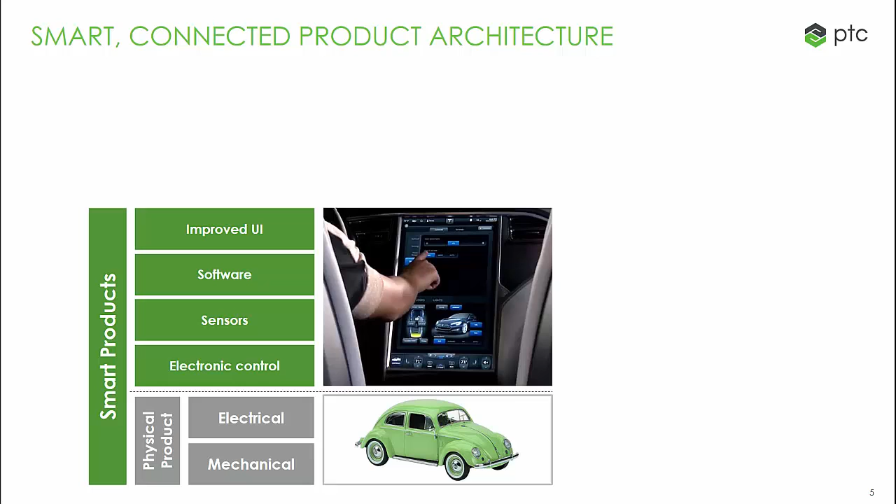So let's start by taking a look at general systems engineering challenges. We're all seeing a broad impact of physical and digital convergence - smarter products, connected products, even smart cities, smart farms, and smart manufacturing. One example is the automotive industry, where cars used to be purely electrical and mechanical, and then were extended with software, new user interfaces, sensors, electronic controls, becoming smart products. And now the connectivity of those smart cars means they can communicate not only with GPS and control centers, but also with each other for autonomy.

This is really an evolution into products being part of a larger system, and this means that we need multidisciplinary product development to cover all those different domains.

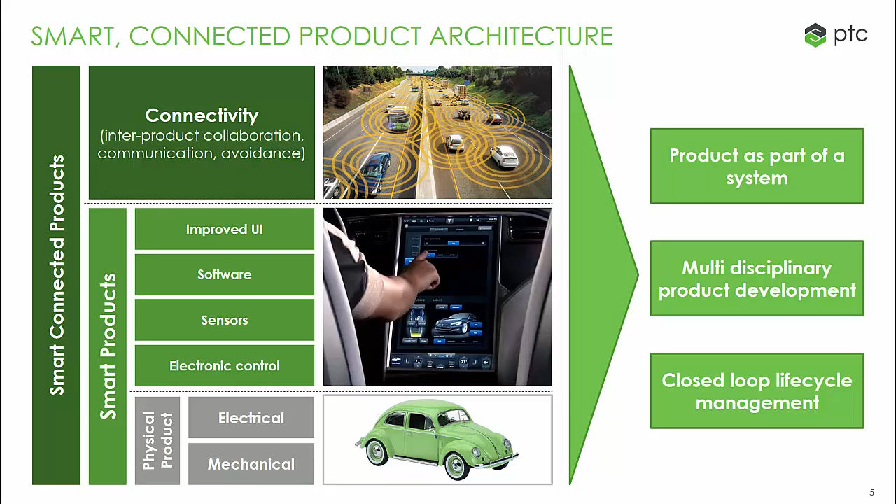So let's take a deeper look at some of the challenges of systems engineering for smart connected products and systems. Firstly, we're seeing a significant growth in the complexity and functionality of the systems and their software. In fact, a much larger share of the product cost is now software. We're also seeing systems being built of subsystems, so in a modular way, plugging subsystems together to build larger systems, either provided by one organization, by partners, or even by disconnected organizations. Certification and regulation are also becoming more important, particularly in industries such as aerospace, automotive, rail, energy, etc.

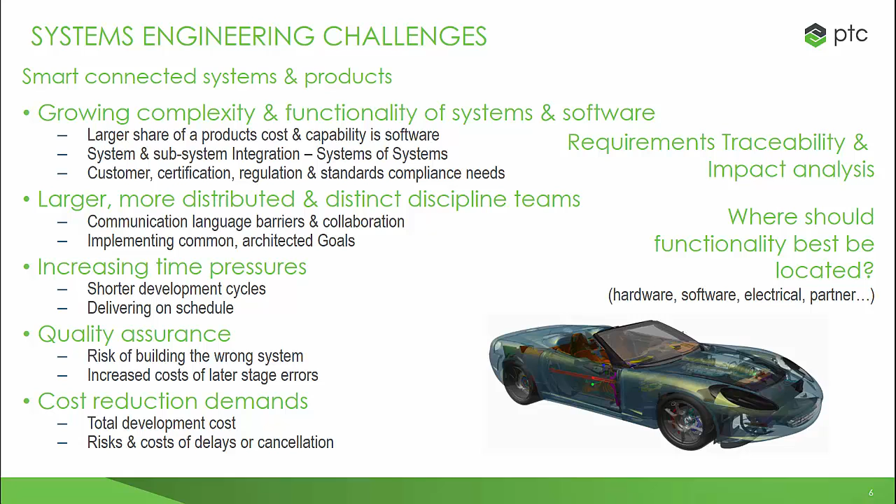The second main thing that we're seeing is larger and more distributed multidisciplined teams with barriers to communication and collaboration. So they need a common place to work together and share their goals and get stakeholder buy-in. As well as those focused systems engineering challenges, we're always seeing the same challenges of delivery on time, to quality, and reducing cost. Particularly with systems engineering, we need to see, in most cases, requirements traceability and impact analysis, so that we can make decisions about where functionality should be best located.

Then in systems engineering specifically, we're seeing some new trends. We're seeing more rapidly changing requirements and shorter iterations of delivery. We're seeing models as the core of communication between all stakeholders, incremental functional analysis, executable requirements with SysML architecture to enable parallel teams to work on separate subsystems, and also the need for asset-based modular design of subsystems and their interfaces and system variability.

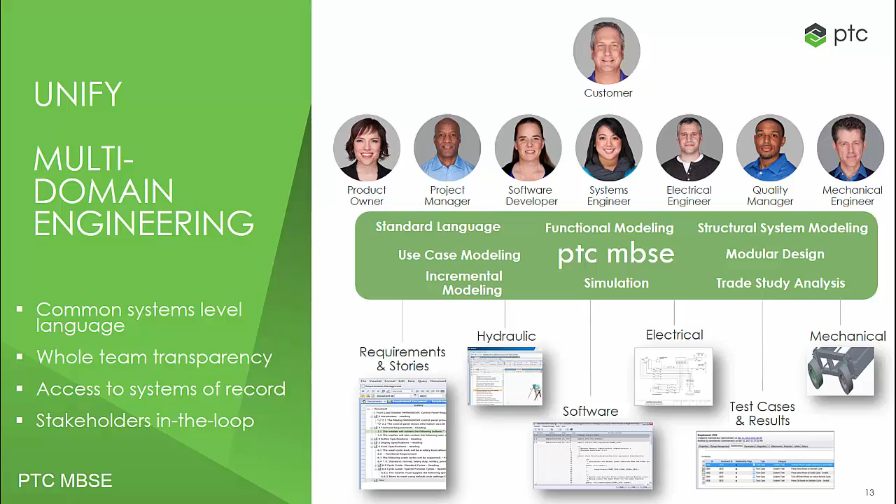We achieve this by using a live underlying database in Integrity Modeler, the modeling tool. Multiple users can share the same databases and the same information on all of their models. So let's take a look at an example model.

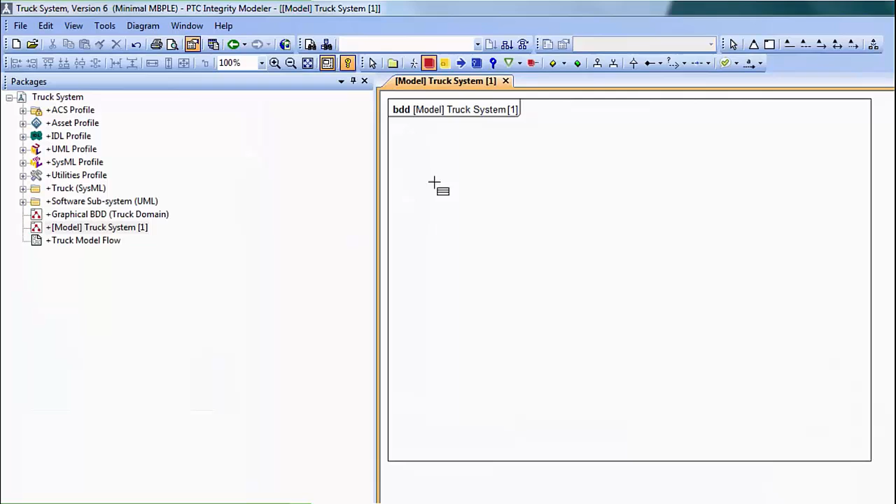In the model, we have both diagrams and data that's used on those diagrams. And the data is stored in a dictionary and can be used on more than one diagram. So diagrams are just views of the underlying data. They're not pictures like PowerPoint or Visio. This is a real model with views onto the underlying database.

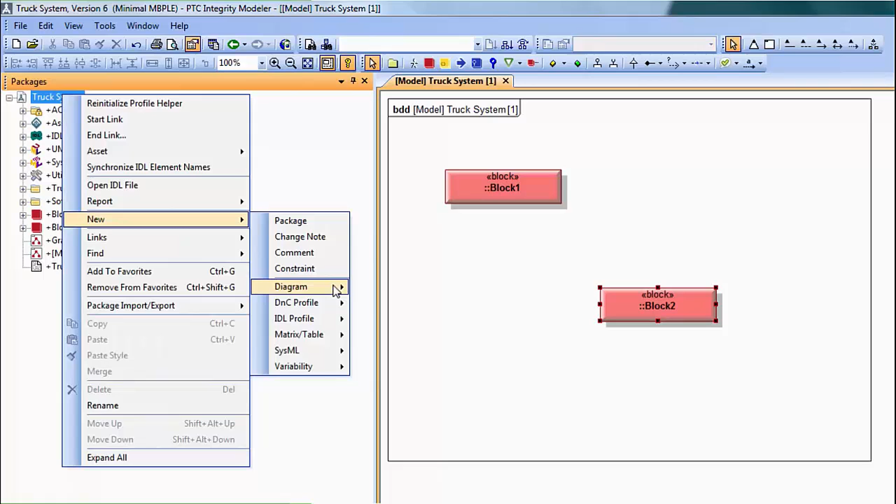So here I've created a diagram with two simple blocks on it and named them block 1 and block 2. I can create another diagram, so here's diagram 2, and use those same model items on this new diagram. I can put them in different places, link them in different ways, and create a view for a different audience.

If I make changes, so if I rename one of these items, let's change the name of this item, you'll see that it changes both in the database, in the dictionary, so here we have the new name item, and if we go back to the first diagram we can see that the name's changed there. So we have consistency throughout the whole model, no matter how many users are updating it at the same time.

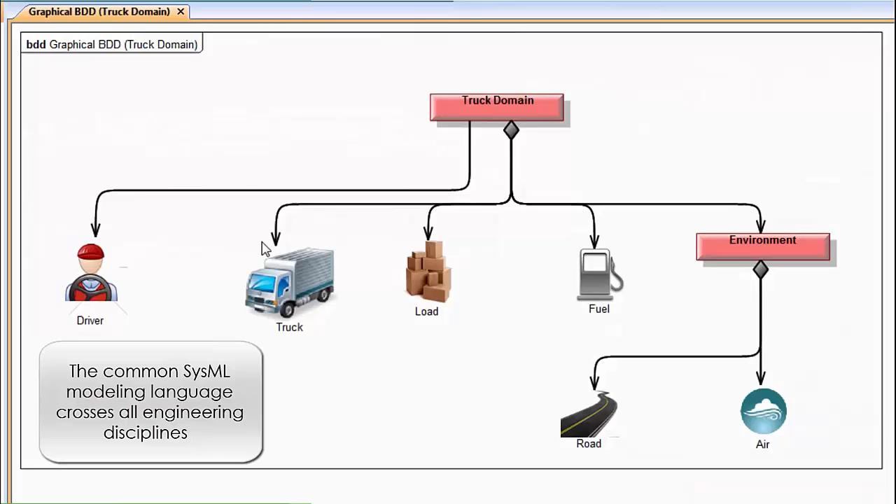We can also model our use cases, our functions, our structure with our blocks, and then link and trace between them. And the model has all of those links and traces built in for all of the traceability and impact analysis you need to ensure you build the right system and build the system right.

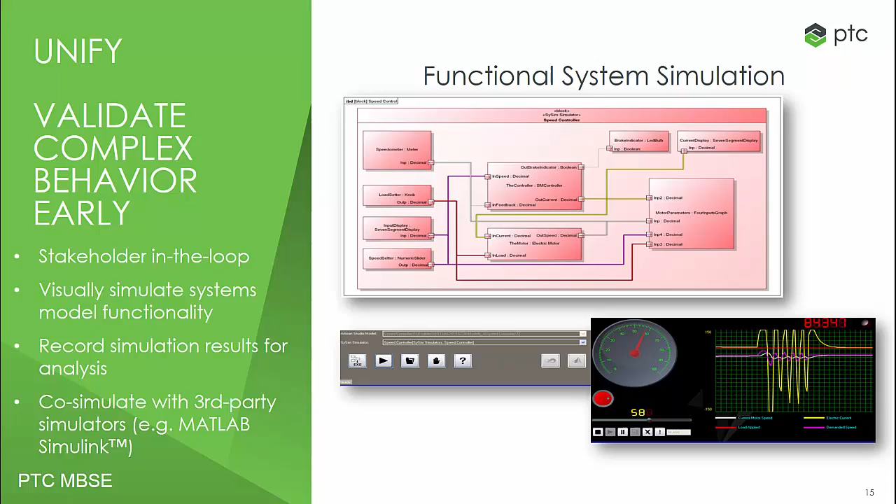Once we have that model, we can then look at it and simulate it, run trade study analysis to ensure we have the right functional design, to ensure we have stakeholder buy-in, and we can record the results and keep those as records, and we can also simulate with third-party tools such as MATLAB Simulink. So let's take a look at functional simulation with Integrity Modeler.

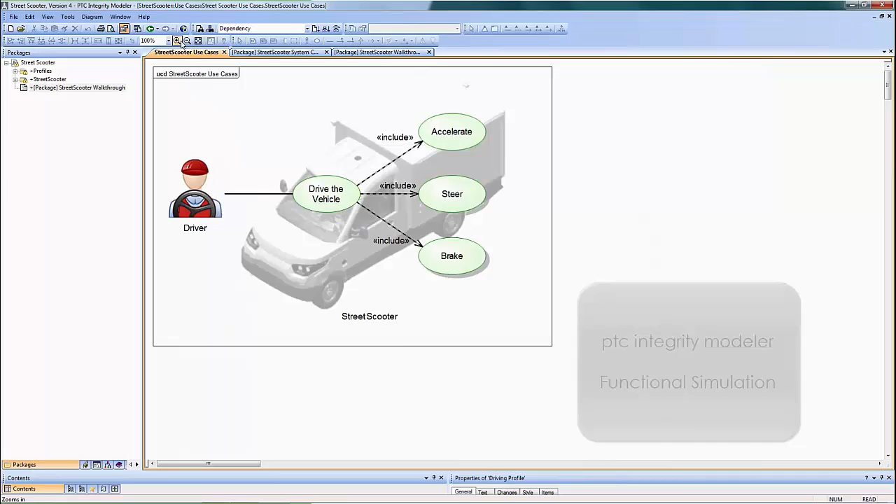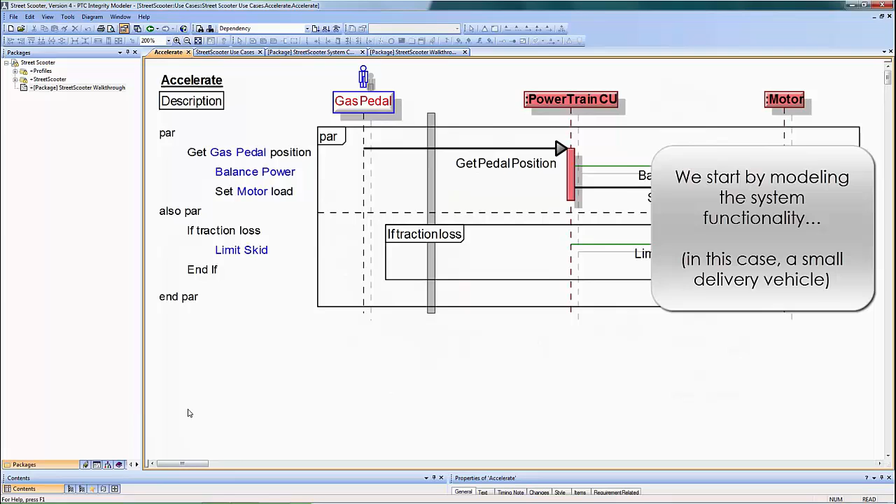So here's our basic underlying model. This is a truck called a StreetScooter that we want to simulate driving around streets to see how its electric power system functions. It has a detailed design of the structure, the functions and the requirements, and how all the parts fit together to quite a detailed level of design.

We can also model the simulation, and this is a co-simulation of parts talking to each other, and this is then used by Integrity Modeler's SySim to simulate the functional design.

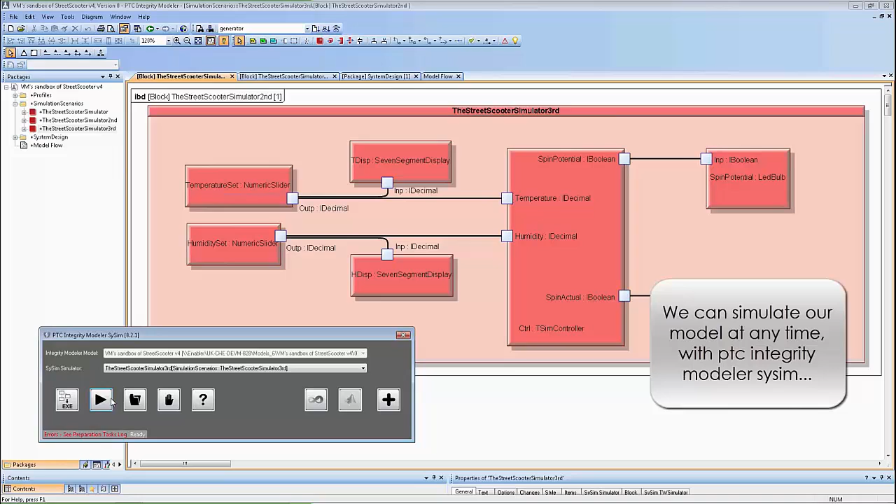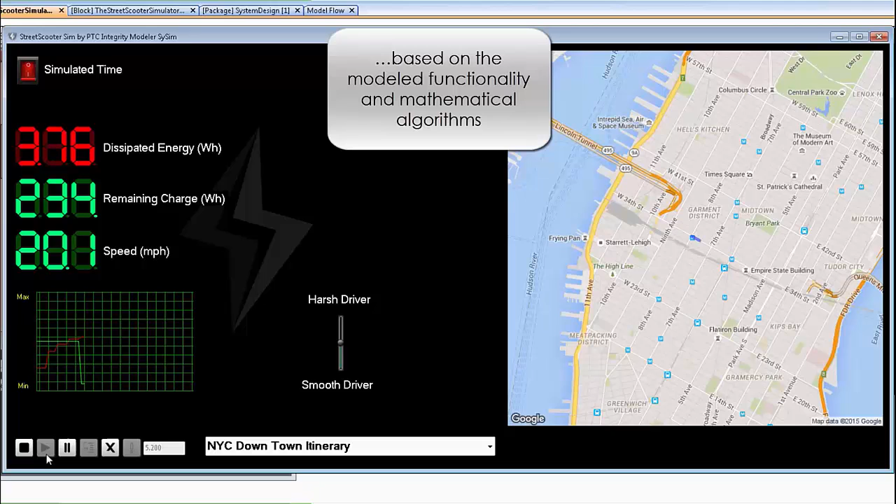So let's run up SySim, and here we have a mock-up interface showing the dissipated energy, remaining energy and speed of our truck. And when we run the simulation, it uses the algorithms inside the model to work out how much power is used as we accelerate, slow down, turn around the curves and speed up again.

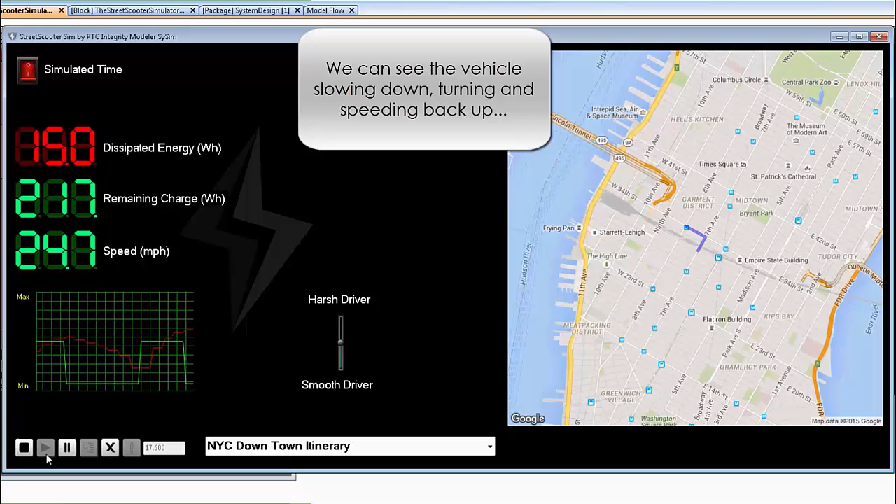We can see the energy dissipating from the battery, and in the graph at the bottom we can see acceleration and deceleration and that power use. So we can use this with the stakeholder, with other engineers to review the functional areas of our design to check that we have our design right.

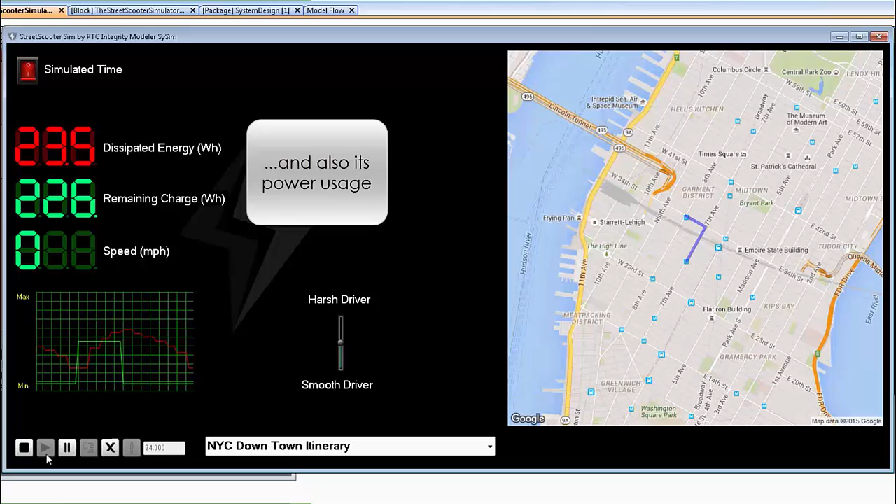If we find problems here, they're much cheaper to fix than later, even when we've started to build prototypes or physical systems.

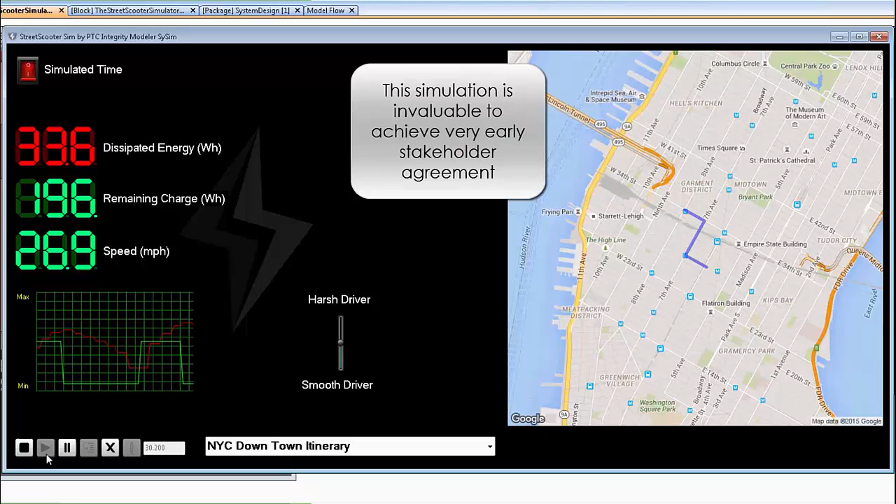As well as simulation and that modeling for communication, we also need to make sure we safeguard our design and that we're implementing in a traceable way. We need to do that by designing in quality rather than testing it in after we've finished.

So as well as making sure that people apply the modeling language standard in a compliant way and correctly, we also need to provide traceability and automated tools for early problem identification. So let's take a look at traceability first.

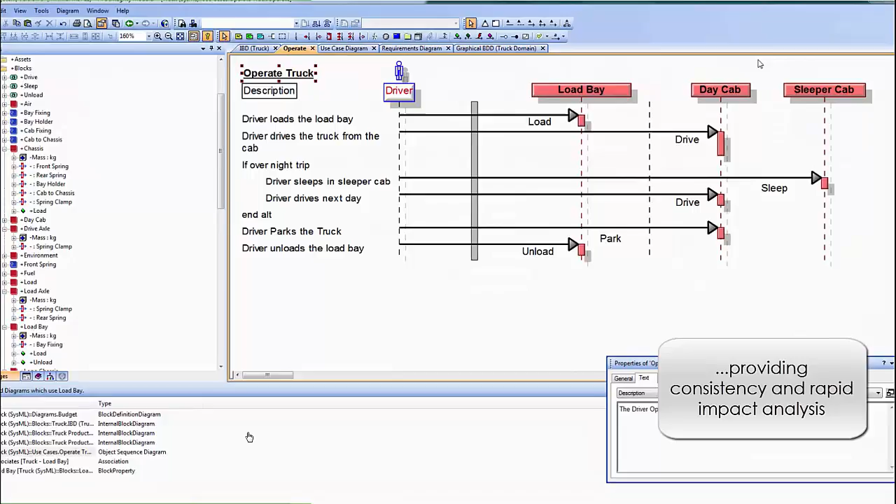In this example, we're starting with a block, a part of a system, and we want to trace back up before we make any changes to see what requirements this block is implementing, to see the impact before we make the change. So we can jump from the block to find out, in this case, the functions that the block implements, and then trace those back up to the use case that those are implementing.

So here we have the load and the unload functions, which are then used by the use case operate truck. And by using our relationships view, we can then navigate and find all of the requirements that this use case and therefore these functions and this block implements, giving us full end-to-end traceability in the model, all the way from requirements through functional design to system structure.

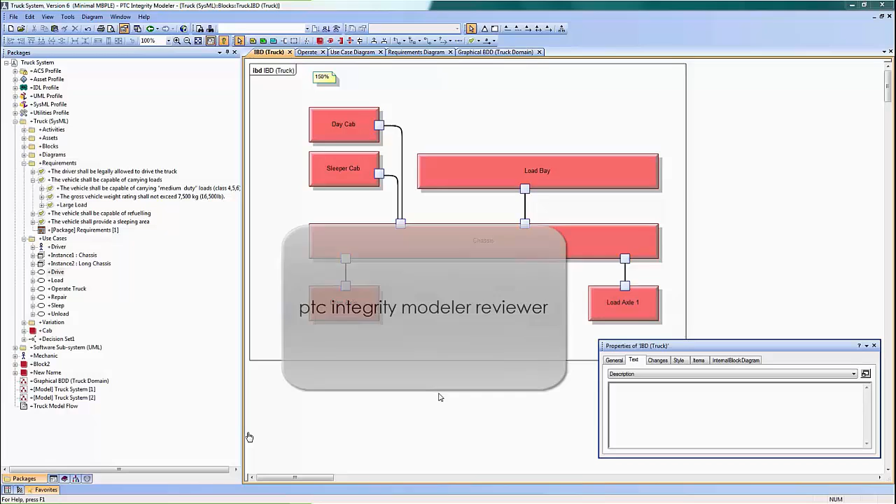We also want to check that the design is a good design, and we provide Integrity Modeler Reviewer for that purpose, and here we can run automated reviews, and we have 110. You can add your own and configure the reviews we provide to provide firstly a management dashboard about the completeness and correctness of our model. Here we can see we're in pretty good shape, but we still have some work to do.

And then further down we can see all of the problems and the number of those problems, and even see them ranked by the percentage. And in this case we can see that we have unscoped use cases. If we don't understand what that problem is, we can find more information about the problem, the consequences of not fixing it, and the strategy for fixing it. So very rapid and automated review of our design, helping us again find problems much earlier in the life cycle when they're much cheaper to fix.

We also have good agility in our models. So we have approaches for agile modeling, doing just enough modeling to deliver the system design and deliver the product. We can also model in an iterative and additive evolutionary way. One of the great features to help us with this agile modeling is that we have the idea of increments in our database, so in the dictionary. And incremental delivery allows us then to build up our system over time, delivering functional parts in an incremental way.

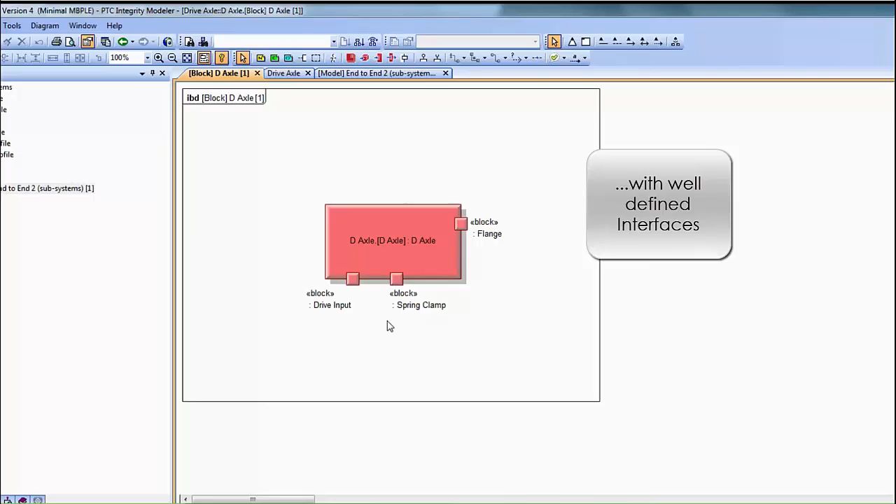So firstly, we'll start off with a model in Integrity Modeler of a drive axle, so part of an overall truck. This has a fairly complex internal design. It could have electronics, hydraulics, mechanical parts, and it has a number of interfaces. In this case, a flange, a clamp to the spring, and other interfaces.

All we need to do to make this an available subsystem is firstly set it as an asset, and then just drag and drop it into a separate Integrity Asset Library. So this is outside the model database in a more widely available asset library that can be accessed across the globe by other engineers who want to reuse our drive axle system design.

Now that it's published, we can see that drive axle in the asset library. So here's the view into the reusable asset specification meta model. You can see the interfaces, lots of descriptive information to help us find it and reuse it or use it for the first time.

So now we're in our higher level system of system design. We can reuse that asset. So just drag it straight onto a diagram, choose the modeling language we're using, in this case SysML, and now we have the drive axle with its version, so full configuration management.

And we can use the external design, so the block and the interfaces of that drive axle without all the complex real internals and detailed parts of our subsystem. So it's treated very much as a black box with interfaces that we can then use to plug together our system of systems. This is a unique approach from PTC to designing systems of systems using asset-based modular design.

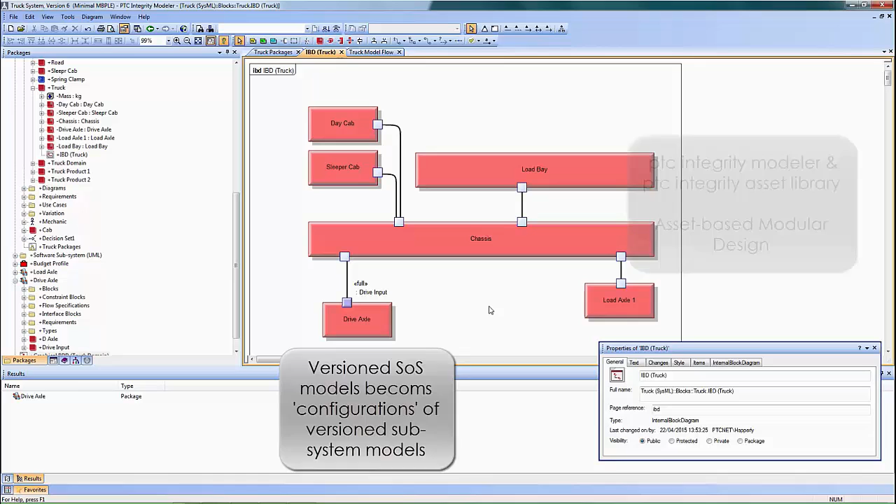Once we've used those assets, we can then also navigate across the links. So we can jump from the model to find that asset in the asset library to read more information about it, and we can also jump to the model that implements and designs that detailed asset. So this gives you real power for modularity at design time, helping you design the same way that you build.

So now let's take a look at system product line engineering. The third main challenge area is that of system families. So we expect to see product families later in the product lifecycle, but early on we also need to consider families during systems engineering.

Organizations are seeing explosions in their system families. They have to decide between the various options. They have to customize existing capabilities to suit new client requirements. They want to redeploy common systems and software to the market, and really improve the time from requirements to cash.

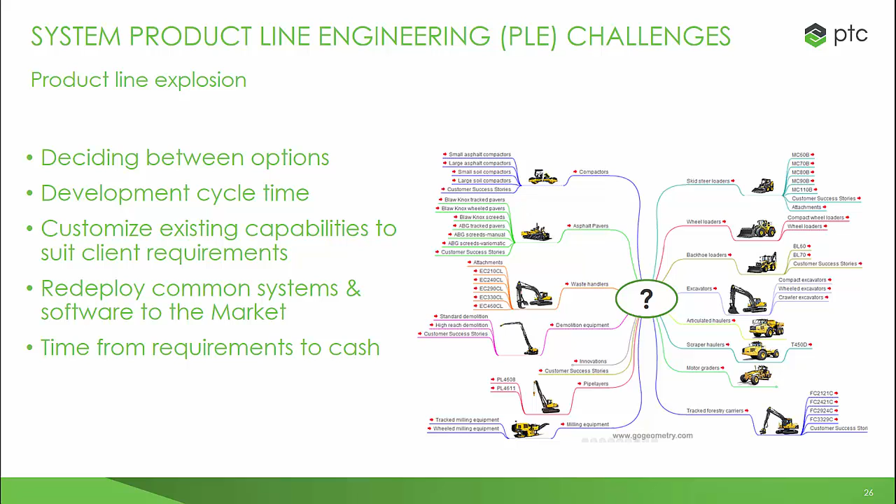And then using the combination of our systems model and our variability model, we can make choices and decide on the various features, the various variants, using a variant selector. Once we made those choices, we can automatically generate product instance models that we can then simulate and run trade study analysis on to decide if they are good possibilities for system and product design.

If not, we can throw them away, come back and maybe change either the underlying system model, the variability model, or make even different decisions and regenerate another product model and test it again to see if it's a good design. The variability model is in concept very simple.

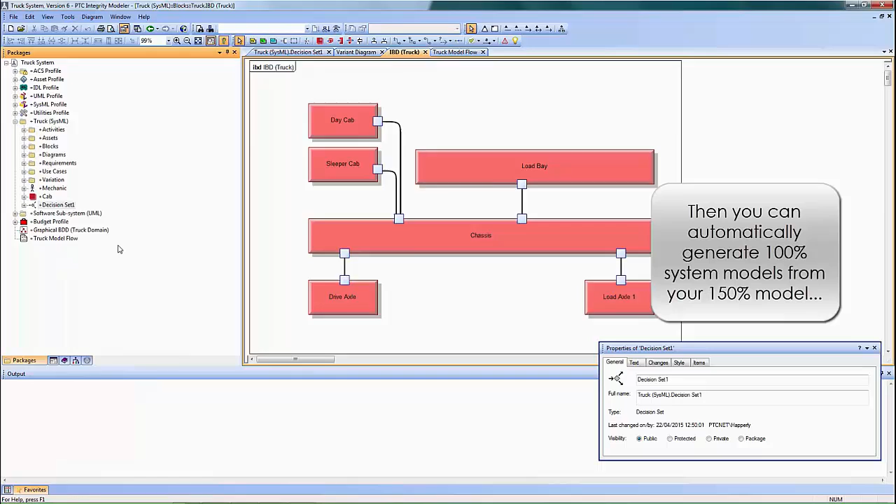Once we made those decisions, we can then use Integrity Modeler to automatically create a product instance model. So now we're using those decisions that we made earlier to build a new model traced and linked back to the original based on that family model, variability model, and the decision set. And if we open the same diagram, we can now see that the truck has only one type of cab, the sleeper cab for long haul.

We can now run trade study analysis, simulation, and bear in mind this is a very simple example. So great productivity, great reuse, and consideration of variation. Really powerful tool for systems engineers. Now let's take a look at lifecycle integration.

As we saw earlier in the session, model-based systems engineering really becomes the platform which is shared between all stakeholders and all the different domain engineers, really enabling systems thinking. That means it needs to be connected to the other tools in the toolchain,

connected to requirements if you use a requirements engineering tool, connected to simulation and co-simulation with third-party simulation tools, connected down the life cycle into ALM and PLM, and maybe even connected to create outputs such as documentation or flow down into software design and code generation. We provide many of these integrations to connect model-based systems engineering in your toolchain.

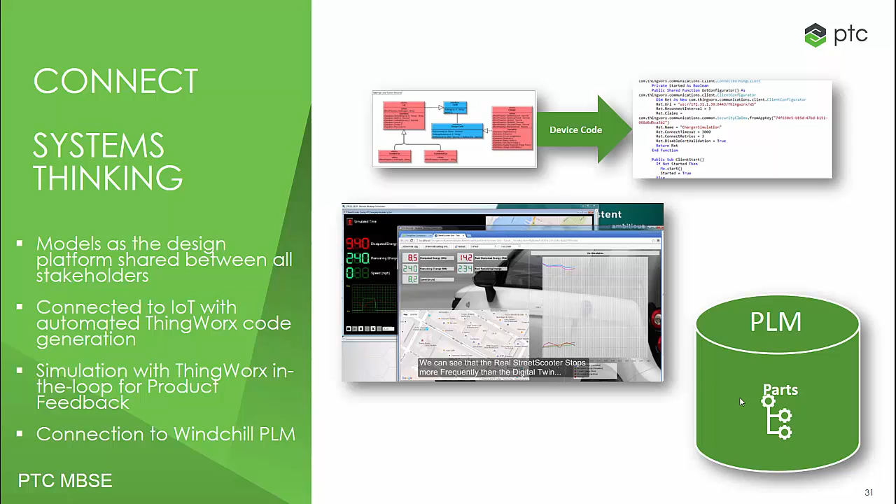So firstly, let's take a look at an example around automated code generation. At PTC, we have a technology called ThingWorx for implementing the Internet of Things. It's a multi-tier architecture running right from the devices, so software, smart connected devices. For example, in this example we have a charging system and a car with software running on those devices,

not only to control them and control their interactions and the interactions with users and other systems, but also to feed data back up to the cloud through data links and maybe up to control center applications and dashboards. ThingWorx enables this implementation of this architecture. But in Integrity Modeler, and particularly with MBSE, we can design that architecture.

So we can design how the user will interact with our overall system and system of systems. We can design the components, the subsystems and their interfaces and how they should be connected and what data should flow between them. And we can also design the detailed code that runs on those edge devices.

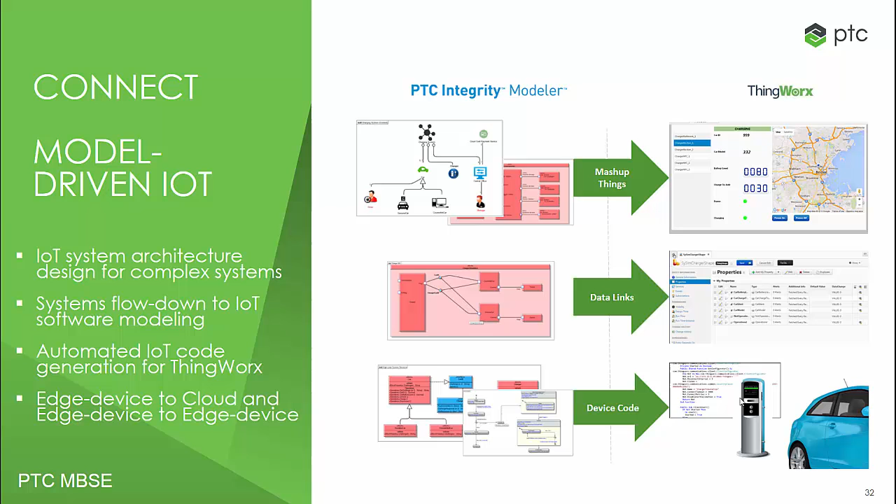Integrity Modeler has always been used for this multi-architecture design of systems and software, and already generates code to things like C++ and Java and other languages. More recently, we've added integration to automatically generate for PTC's ThingWorx. So let's take a look at that in action.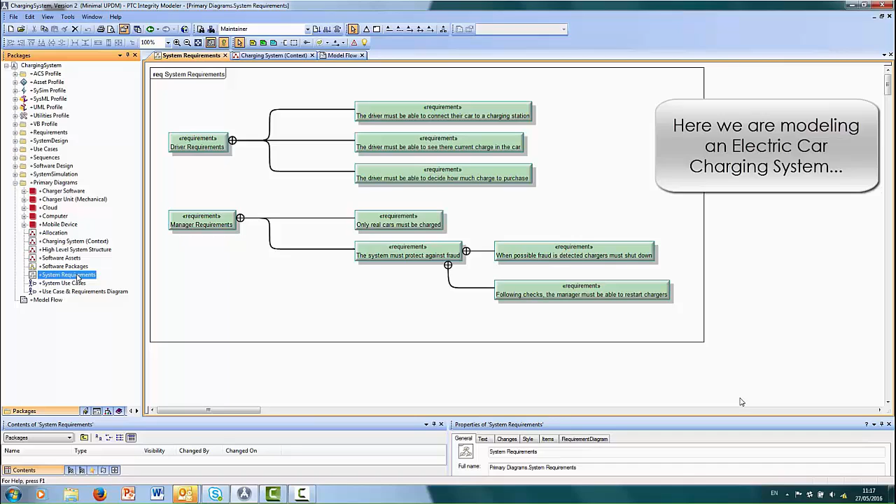So here we have an Integrity Modeler model. This is a car charging station and car charging system which has requirements for the driver and managing the system. And those are then satisfied or refined by use cases. So using the charging station, charging a car, and also detecting fraud, so malicious attacks on our charging stations.

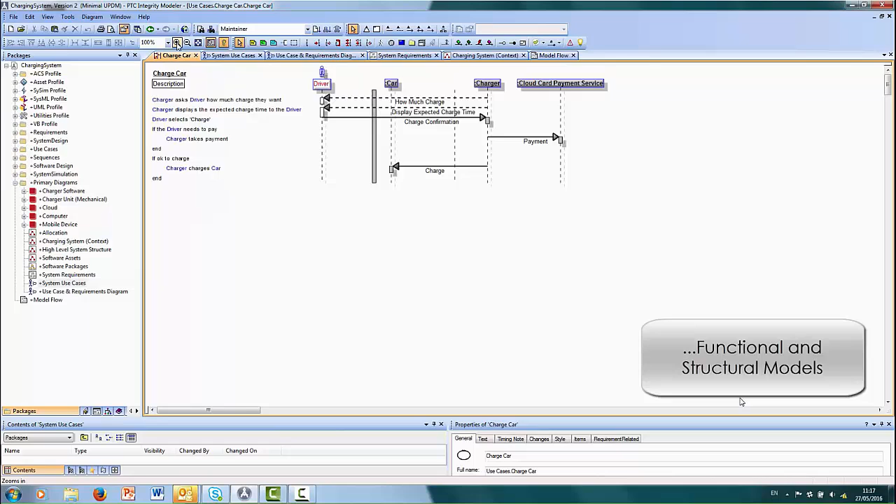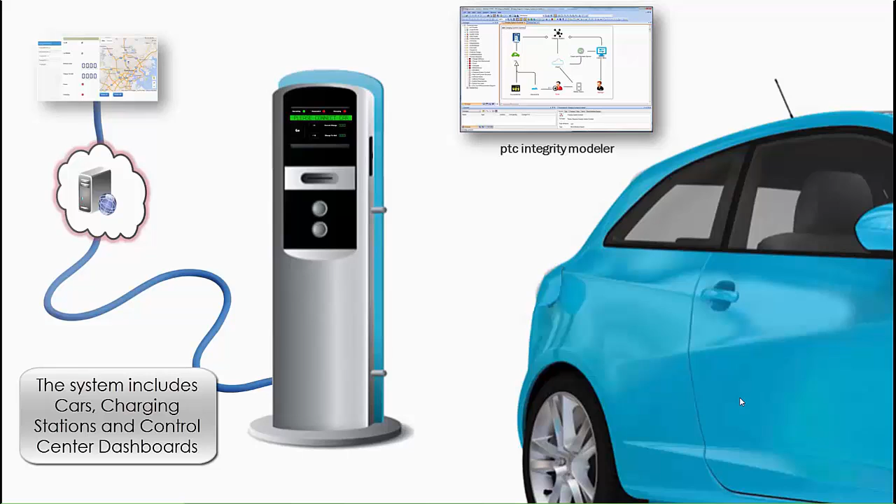Each of those use cases then has internal design of the detailed requirements, the functions such as charging and payment, and the subsystems involved, so the parts of our system, like the car and the charger. And that model is then implemented in real life. So here we have the real charger, the real car, and a connection to the internet, and maybe a control center with a dashboard.

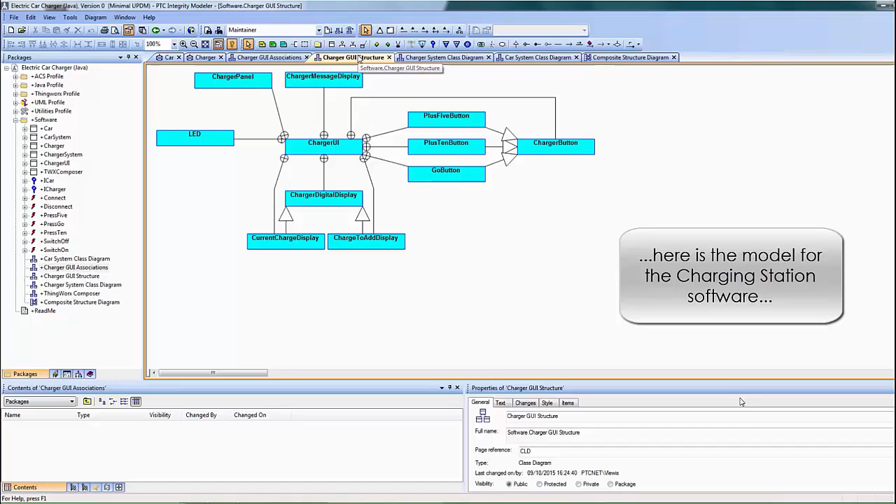As well as the system, we can also model the software within Integrity Modeler. And here's an example of the charger system and its software design, using models and diagrams to define all the details about the structure of the software, its functionality, its parameters and its logic, and the various states that it can go through. As well as the charging station, we're also modeling the software that runs on the car.

And by setting a simple flag on these items, we can say that they are specifically for one language. It could be Java, it could be C++, it could even be ready for ThingWorx. So this is a generic design that can be generated into many different outputs. In this case, we're generating ThingWorx-ready code for our Internet of Things stack.

Here's an example of the code that's been generated for the car. You can see it's preloaded with all the ThingWorx items necessary to feed the data up to the cloud and up to a mashup, and also to be controlled remotely by the applications.

We also have the software for the charger, and as well as all the code you need to communicate up to the cloud and send information and receive instructions, we also have code to communicate between devices for systems that don't necessarily need to connect to the internet while they're running, but want to connect to each other, like the car and the charging station.

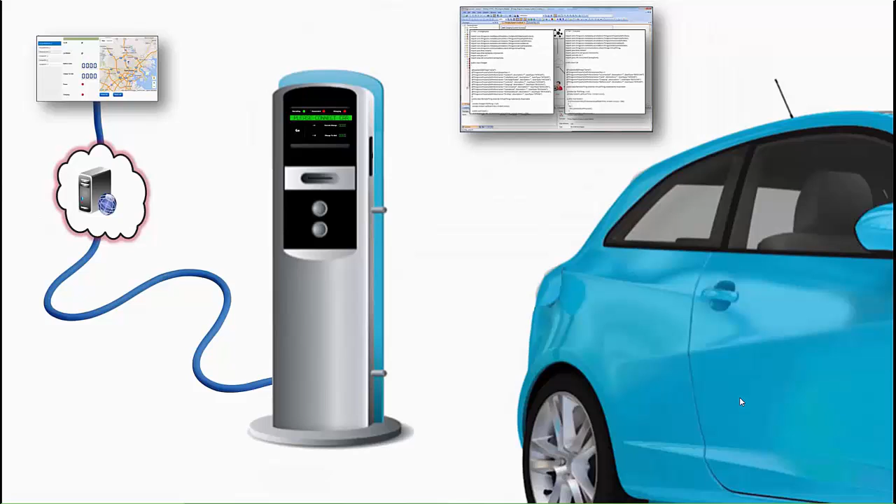Once we've modeled and designed that code, checked it, reviewed it, we can then generate the code and deploy it onto the charging station and onto the car. We can simulate it before we do the physical deployment, and it's shown here with a simulation of the user interface.

So here's the user interface of the charging station. It's saying connect the car. So in our simulation or in the real life with the software, we can connect the car. As we saw in the state diagramming and the state models, that will then check that this is a real car rather than a fraud attempt. The car will then tell the charging station what charge it already has in the batteries.

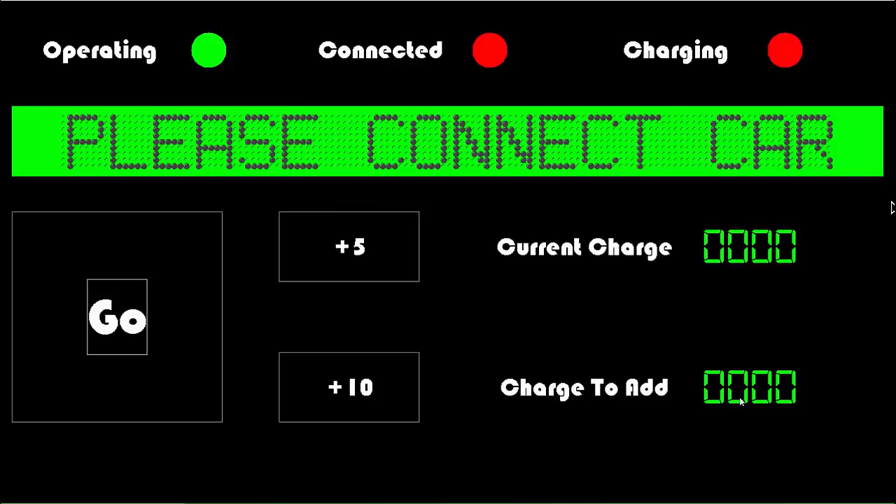Once that's confirmed, then the user interface will ask the user, the driver, how much charge they want to add to the car. In this situation, this is actually Integrity Modeler's SySim simulating the user interface based on the logic in our model. So here we're interacting with the simulation, telling the simulation and the car charger how much we want to charge, and then we're starting the charge with the go button.

You can see there's information about the current charge and how much is being added. And then the simulation will run, and if we've deployed live software, the live software will run and start charging the car. As this is a ThingWorx deployment, that information about the charging is also being streamed to the cloud, and here we have a ThingWorx mashup actually monitoring that data that's coming up from the Boston One charger.

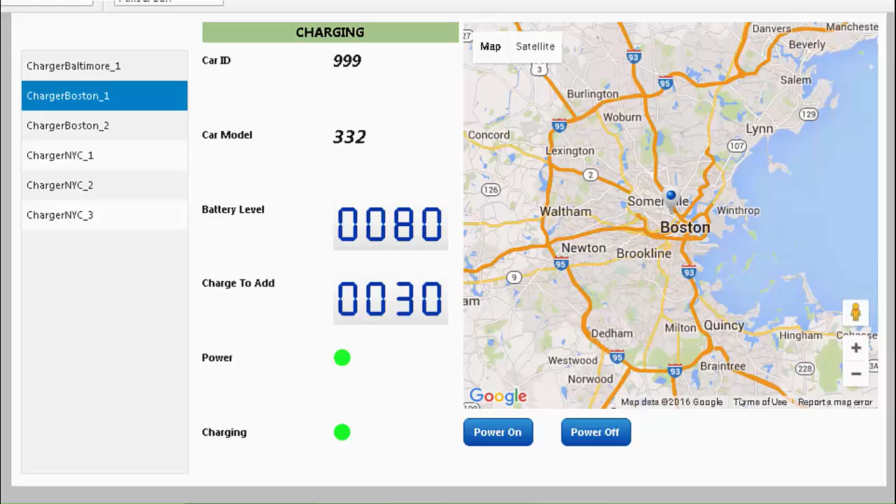We can see the battery level, the charge to add, and we can see the charge as it's being added to the car. We could also do other things here, like turn on the power, turn off the power to the charging station and control it remotely. So as well as generating the code that runs on the devices, we also generated the code that sent the information up through to ThingWorx, through the cloud, to the mashup and the dashboard.

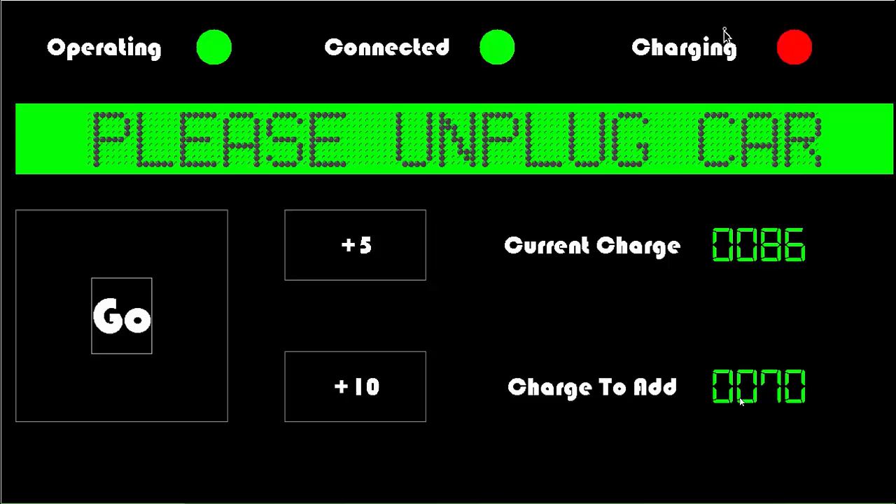However, as we mentioned earlier, the code can also communicate between devices. So if there's no human in the loop, we can elegantly disconnect the car from the charging station without overcharging, for example. And then when the charging is complete, we can tell the user to disconnect the car and we're finished. So that's a very simple example of modeling software in Integrity Modeler based on a higher level system design, automatically generating code that can be simulated before we deploy, and then actually deployed and used in real life.

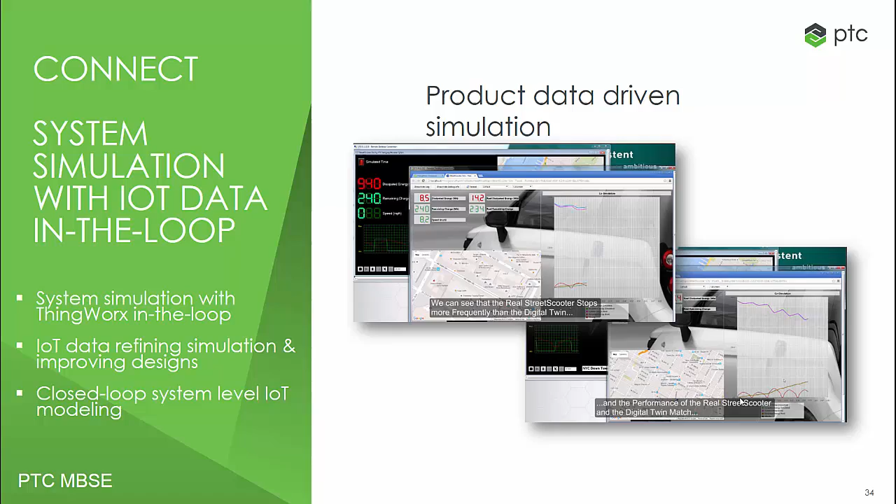So that's one example of connection. We also mentioned simulation, so we can simulate our designs before we even generate the code. And that helps us find problems, share the designs, the functionality with all the stakeholders. Maybe they don't understand detailed modeling and diagramming, but before we create any physical prototypes or software prototypes, we can share the logic and share the understanding of the system, review it and improve it with simulation.

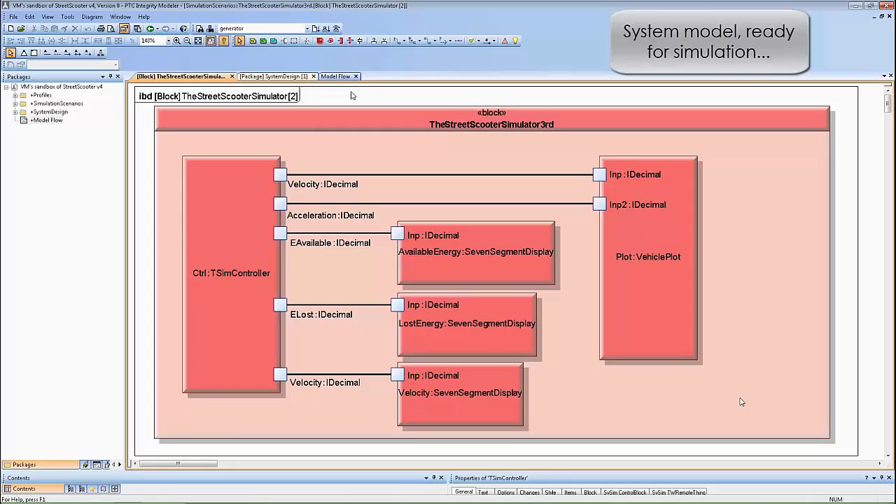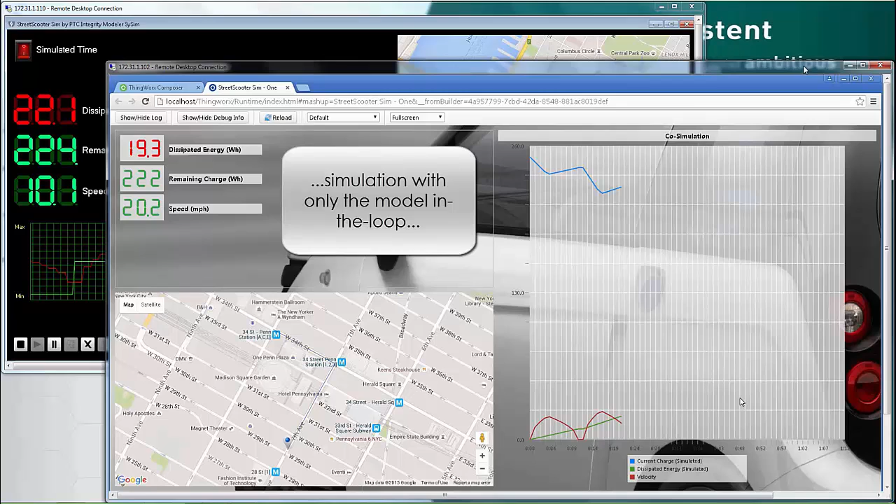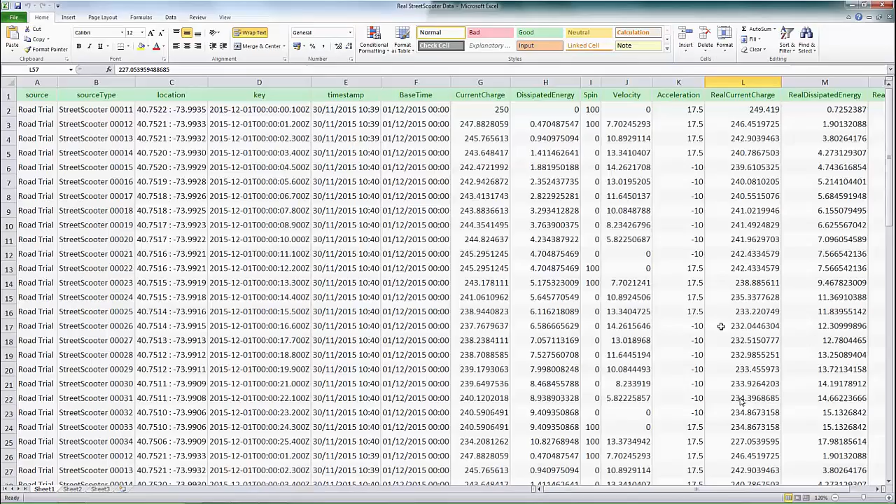So let's take a look at Integrity Modeler SySim. So again, it's based on an underlying model, an underlying system design, and also a design for the simulation, so what parts are connected together and what displays we want to provide on the simulator. Using that, then we can run SySim, and in this case, we can run it with ThingWorx mashup in the loop. So SySim here you can see running in the background, but in the foreground we have a ThingWorx mashup which is receiving data directly from the model.

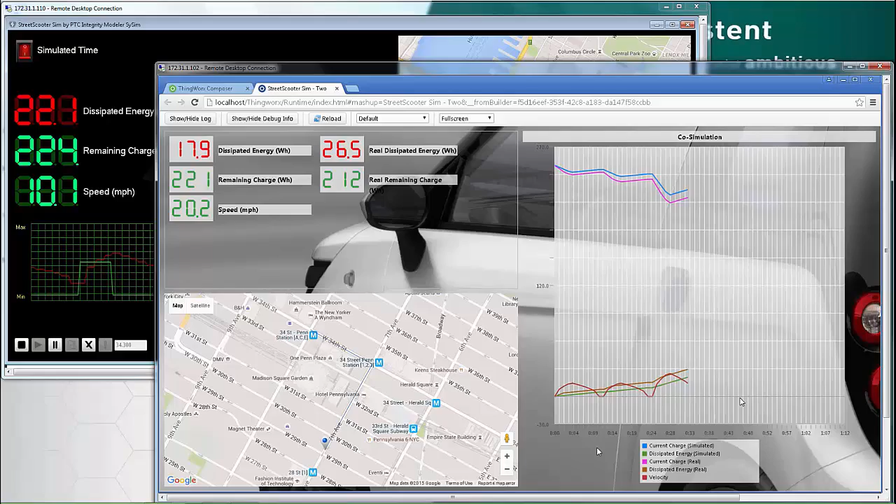We can also take real data from real devices and feed that into the simulation in SySim and run it again, comparing our model-based simulation with our model-based algorithms and the actual data received from a real car driving around the streets. In this example we can see that there's a difference, and this, after investigation, was found to be due to skidding as we were accelerating and the lack of a traction control system limiting the torque.

So we'll add one of those to the model and set the torque limit to lower than previous, and that will automatically regenerate the code with a different torque limit set. So here's the code that we've regenerated automatically in the background, which we can then deploy to the car and run the test again. You'll now notice that we're running the simulation.

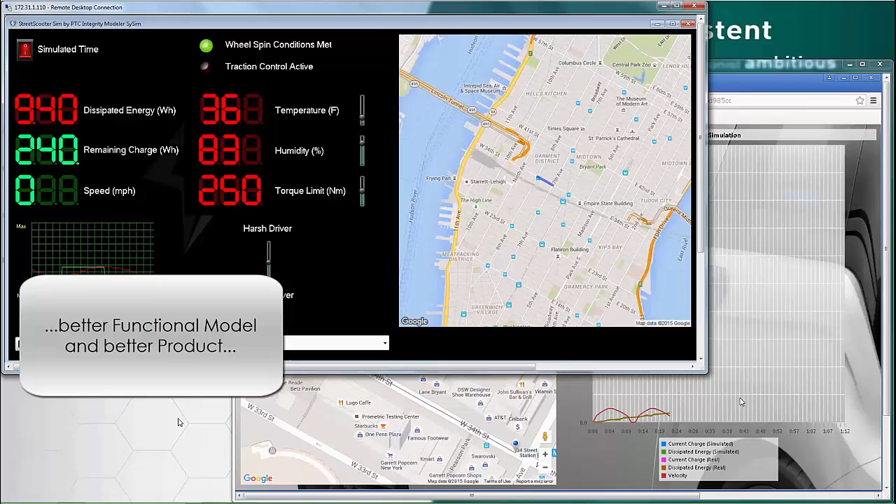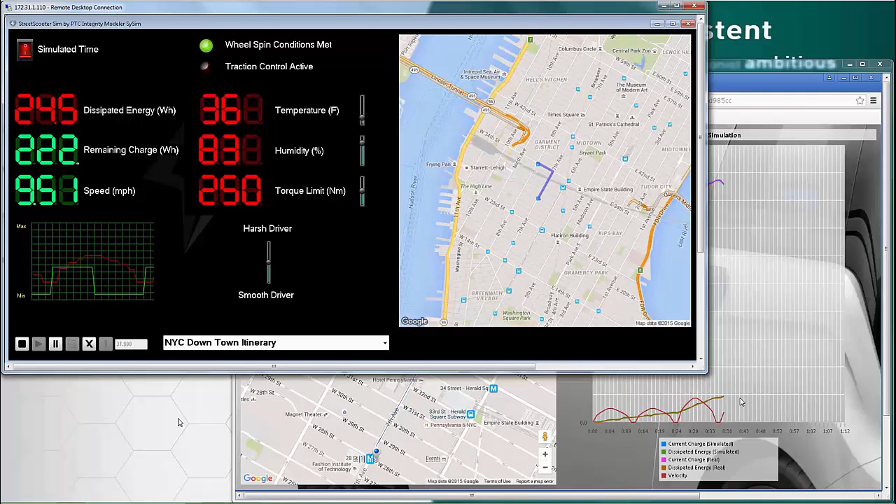We've got the torque limit set to 250, and in the background you'll see that the line for the simulation power use and remaining charge in the battery now matches the simulation. So we've improved our simulation model, and we've also improved the system and the end product based on simulating our systems models.

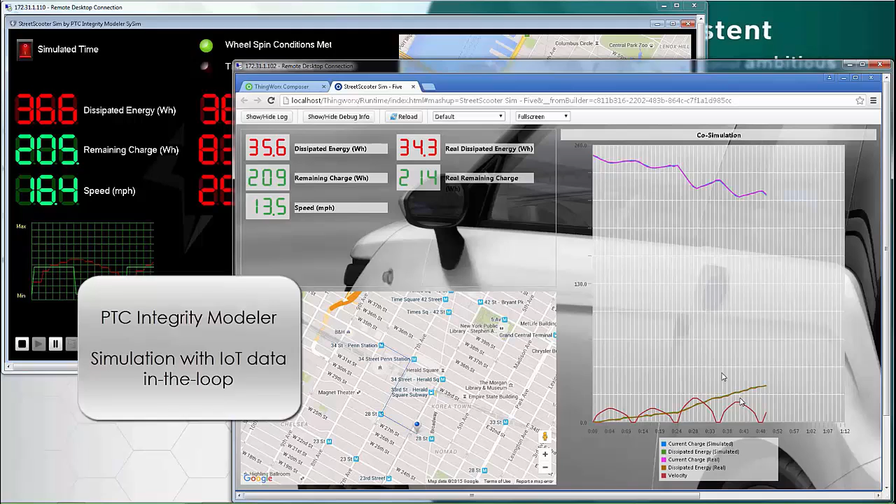So we're simulating with the model in the loop. We can also simulate now with the IoT mashup in the loop, so the Internet of Things and the real device data in the loop.

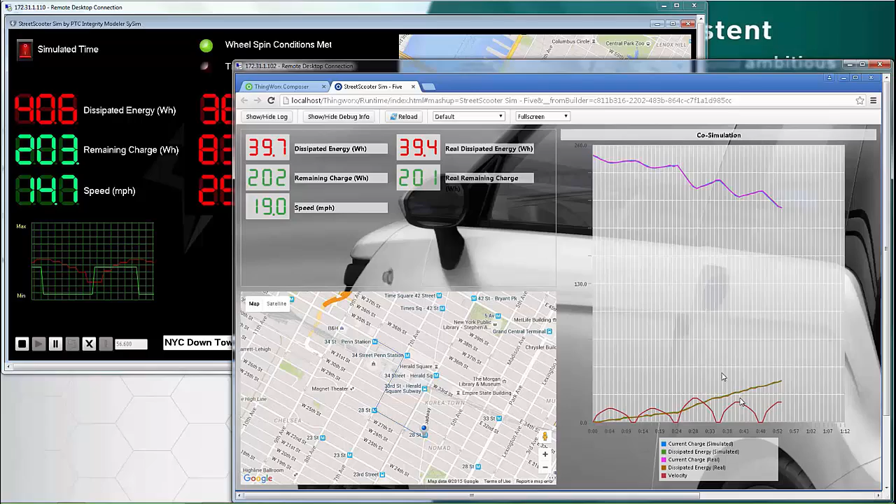The next area is connectivity. We mentioned linking to requirement systems, things like Integrity Lifecycle Manager, great requirements integration there, and maybe other tools like Doors. We have integration with things like MATLAB Simulink, but there's also great benefit to be had from integrating with PLM systems such as our own Windchill and PDMLink.

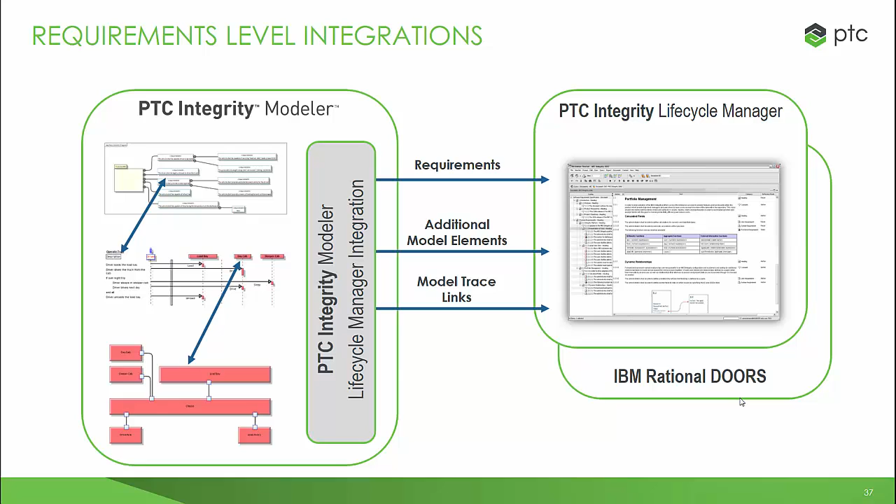So there's various levels of integration. Firstly, with Integrity Modeler and Integrity Lifecycle Manager, bidirectional requirement synchronization and trace and link management. This is a first step in getting towards a whole linked toolchain and traceability across the whole toolchain, from requirements through to functional models in our system model, structural model, maybe even tracing and linking to variability model if you're modeling system product lines, and then through into your parts in your bill of material and maybe even your options and variants.

The way we do that, and here's one example, is with two concepts. Firstly, improving productivity, and then we'll come back later and look at traceability. So let's look at a productivity example in action.

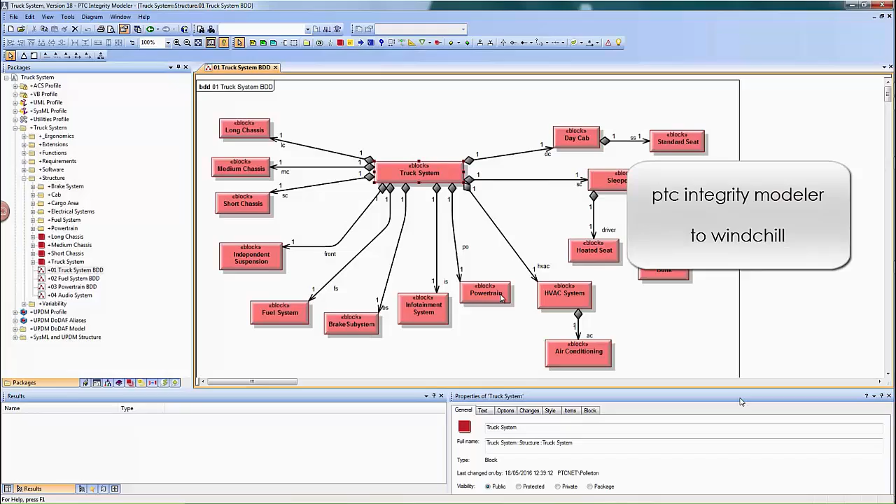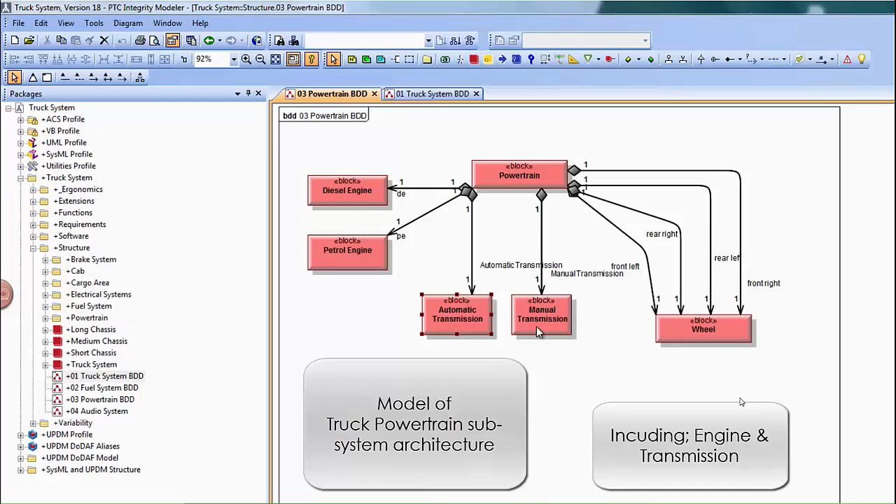So here we have a model in Integrity Modeler. This is a systems model with blocks and their parts representing our system structure. We can also see the information that's on this diagram in the dictionary. This is a real model, not just a picture, and all the data exists in the model database.

So here we have the wheels, the engine, the transmission. And as well as that structural information about our product, and in this case it's a product family because we have more than one engine type and more than one transmission type, we also have the orthogonal, the parallel variability model. In this example we can see the variability of the transmission, so we have automatic or stick shift, and based on the choices of those variants we have different inclusion of different parts. Now, of course, all this information is really useful later on in the life cycle.

We can flow down into our PLM system. So we can start a wizard to export the information. Here we're starting with the parts, the blocks, and also it will automatically show us the variability that's linked to those items. We can decide where to output that file, and if we're a power user we can maybe change the configuration, but typically that's all fine and nothing you need to get involved with.

Once we're happy with the location for export, we can then start the export, and it'll create a log for us, so we have a full audit trail of everything that's being created in the file to be loaded into Windchill as a starting point for product design and product engineering based on a high-level system.

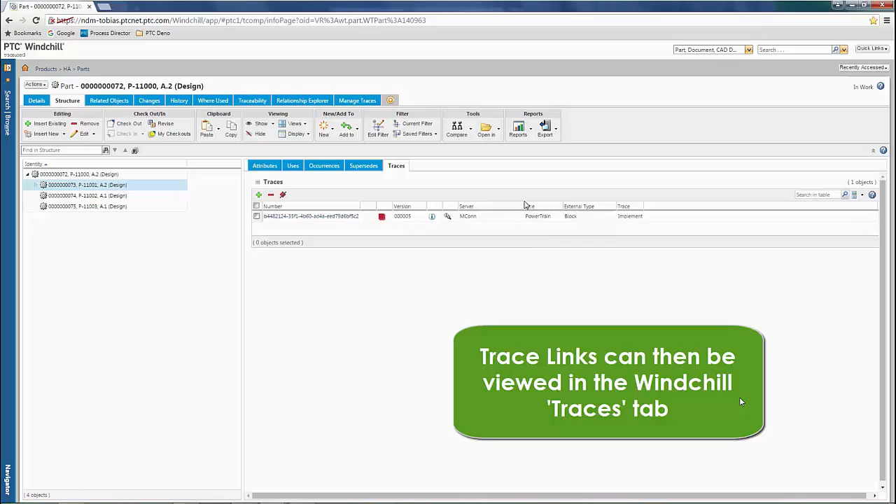Now that those links have been created, if we come back to Windchill and look at the Traces tab, we can see the link traces back out to Integrity Modeler, back out to those blocks. So here we have a link to the powertrain block, and here we have a link to the drive shaft block, and here we have the chassis subsystem and the drive shaft.

From here we can, if we choose to, remove links, so clear them, and then they're deleted as links.

We can also see a lot of information about the system item. So we have a nice icon, the version of that item, more information given from Integrity Modeler, the server it's on, its title, the type of thing, and the trace type.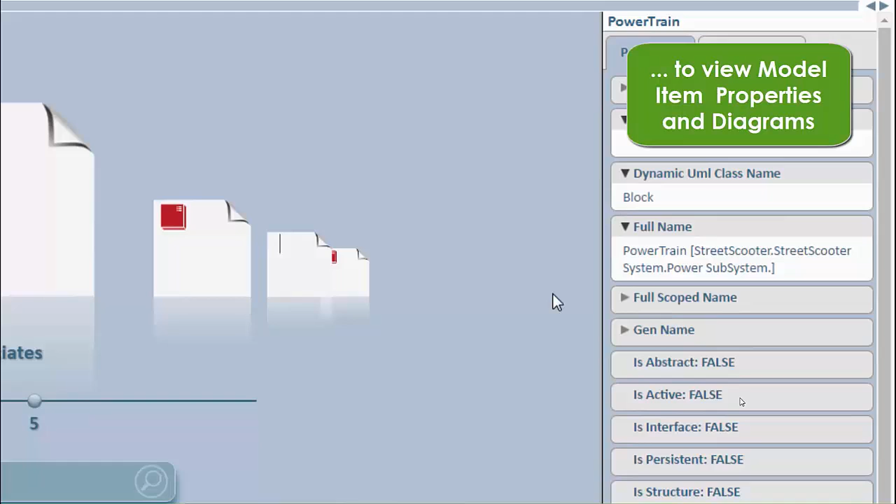The information view also lets us jump immediately across to Integrity Modeler's web client, where we can see more detailed information about that block. We could also trace from here to find out the functions it is used for, implements, and the requirements that function implements. We can also see the diagrams that block's used on and understand a lot more about the system design.

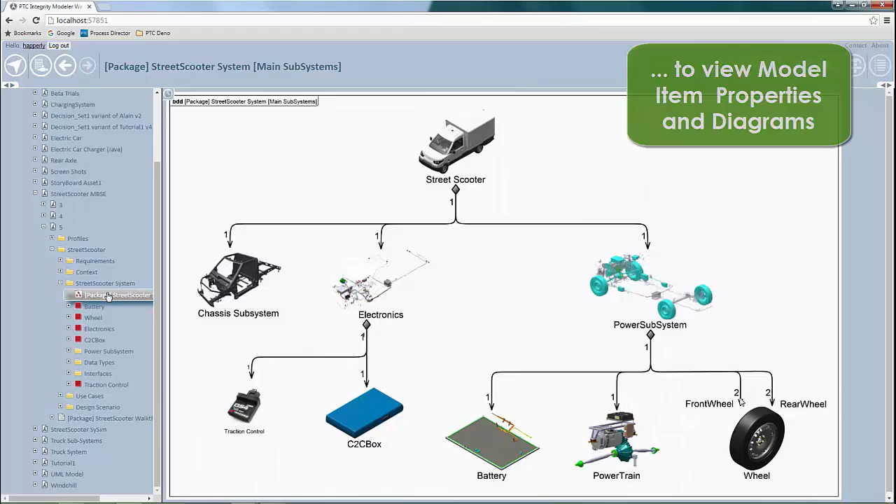From PTC Navigate Manage Traces, we also have more information. So we have details about the parts and also details about the system block, and also other points to link across to both Integrity Modeler Rich Client and the Integrity Modeler Web Client.

So straight from the tracing environment we can jump straight into Integrity Modeler, right on the item that we were following. So here we have the chassis subsystem. Again, here we can see more information about the diagrams that that block is used on.

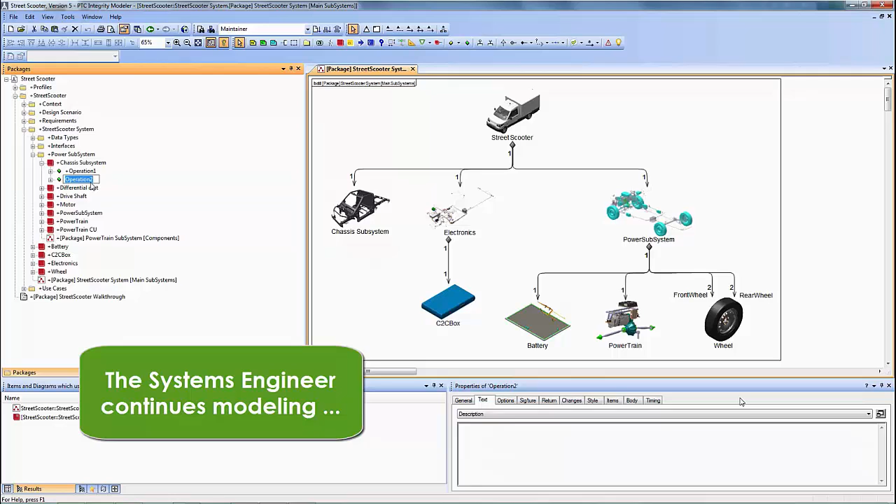Based on those links, we can then open those diagrams and continue modeling as a systems engineer. So as a systems engineer, I may add more information, more properties, more functionality, and as I'm making those changes, Integrity Modeler will log those changes with an electronic signature and a timestamp. This is standard change tracking in Integrity Modeler.

But what that's done is made the link suspect, and here in Windchill we can see the link was suspect, and once we've checked the link is still okay and that those modeler changes haven't had an impact on the trace, we can then remove that suspect flag. There's a kind of to-do list of reviewing the model changes.

As well as jumping to the rich client from PTC Navigate Manage Traces, we can also link to the Integrity Modeler web client. Here we're jumping into the chassis subsystem properties, and we can see things like the rich description.

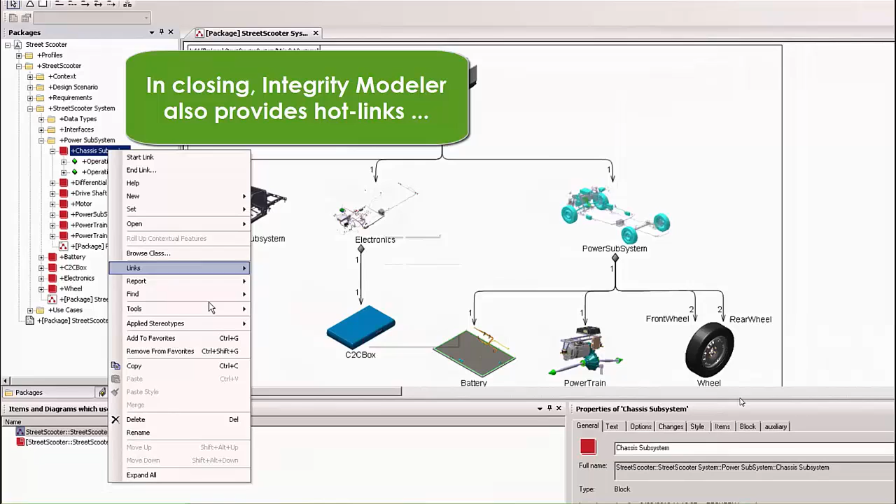And just to close off on this tracing and integration, from the Integrity Modeler interface we can also see which Windchill PDM link parts are linked to each of the blocks, and then automatically jump to Windchill to go and see them and look at their information. So very deep lifecycle integration from the systems model and MBSE to Windchill for PLM.

So now let's take a look at systems engineering process governance. As well as the tools and techniques to use during model-based systems engineering, we also need to consider the process of systems engineering and how we govern that process.

In PTC's MBSE solution, we provide out-of-the-box documentation for industry standard systems and software engineering processes. We provide these in a tool which give you core processes which you can then enhance with your own best practices based on your real-life projects. We provide updates to those processes over time, and you can then use the tool to configure the process, tune the process in a modular way with editing and authoring.

The tool provides automatic process diagramming using a web-based multi-device user interface. You can use it to run projects and gather metrics for improvement of the process in the future. It also has a very powerful process tailoring wizard to give you truly agile processes based on answering simple questions about your product or system and generating project workflows for that project.

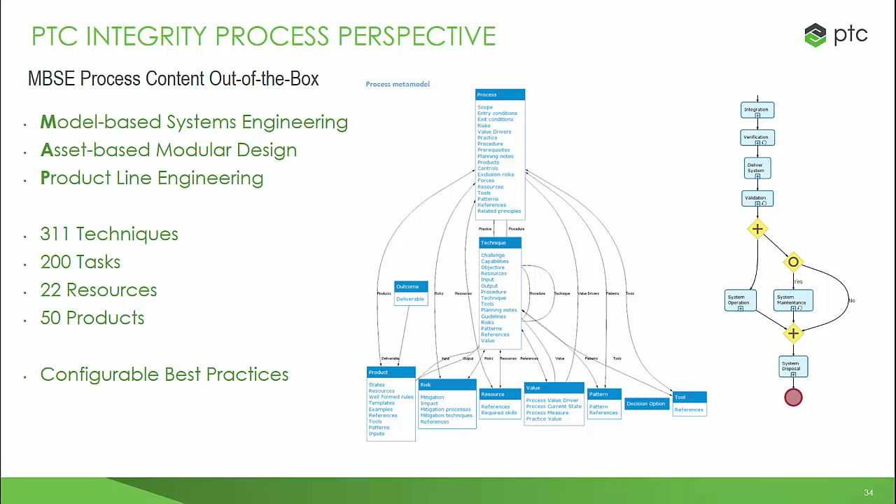Many customers use both that process and approach along with the whole PTC model-based systems engineering solution. So let's take a look at a few examples.

Firstly, Alstom Transport, who build train systems, rail and rolling stock. They use the whole suite of PTC's MBSE solution. They use model-based systems engineering, they're moving into asset-based modular design, and they're already making great use of model-based product line engineering for their product families and variation. They found that our modeling technology significantly improves quality and consistency and reduces effort throughout the whole design lifecycle.

Next, we have CIRA, who build air and space flying test labs. With PTC Integrity Modeler and PTC's model-based systems engineering solution, they've dramatically improved the quality of the work while reducing the time taken to keep their artifacts consistent throughout the design lifecycle.

Another example is PSA Peugeot Citroën, who use the MBSE solution and PTC Integrity Modeler as their tool of choice for their global infotainment system. Integrity Modeler significantly improves the quality of the global infotainment system engineering process at PSA Peugeot Citroën, reducing the project design time and development costs.

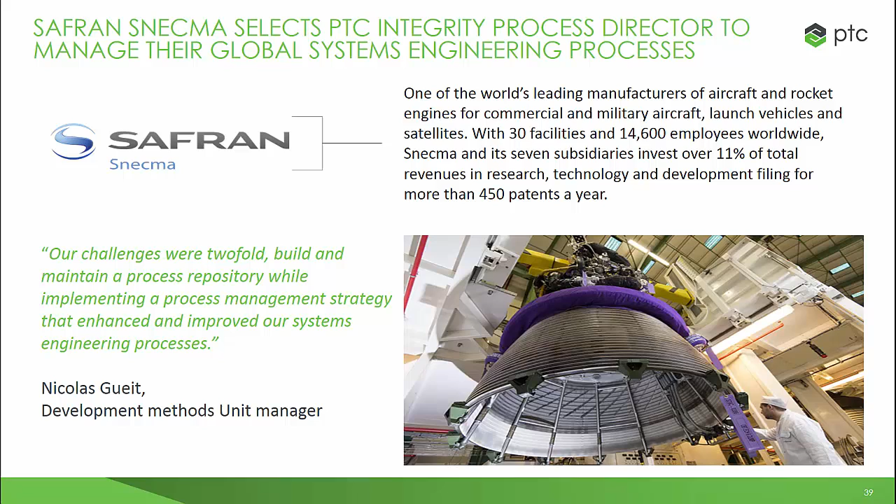And then finally, Safran Snecma, who build jet engines and rocket engines. They had the challenge of not having a model-based systems engineering process or tools. While they started with some best practices in simple documents, they really wanted an approach to document that more widely and improve it over time. So they used PTC's MBSE solution with the starting point of our MBSE process to enhance that process and deploy it across all their systems engineers. So those are 4 very simple examples of PTC's MBSE solution in action.

So just to summarize what we've seen, PTC's MBSE solution can help you dramatically improve the design and validation of complex systems. It responds to the current trends in the market, but also is based on best practices. It helps you with multidiscipline collaboration.

The solution runs live on a scalable multi-user database. It integrates with other tools in your tool chain, such as Integrity Lifecycle Manager, and Windchill. It's standards based for that common language of communication for your systems design. It supports things like SysML and also other standards based around model-based systems engineering and variability modeling. It also provides system level simulation so that you can visually simulate your system's functionality with the model in the loop, and then optionally extend to have other things in the loop such as ThingWorx and the Internet of Things.

As well as that simulation, we can then automatically generate artifacts from the system models. We can generate documentation, but also automate the generation of code to C++, Java, etc., and also our own technology, ThingWorx. It also includes new and groundbreaking asset-based modular design for breaking models up into systems of systems and linking them with an asset library.